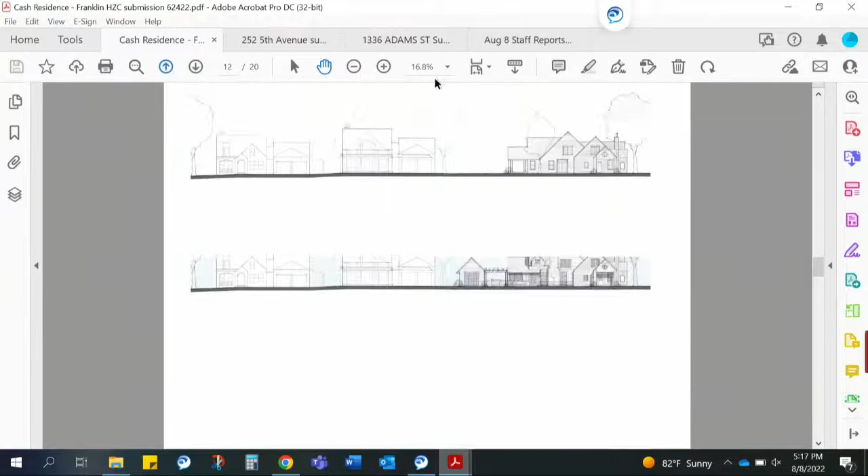I'm going to start with the principal building. We'll figure out the best location to start that. Okay, on the top of the screen is the existing elevation. This is the left side of the property facing Mayberry Road or Mayberry Court. This is the proposed, below it.

In general, the guidelines recommend that any alteration to a non-historic building serve as an opportunity to improve the overall structure's compatibility within a historic district, and that details and ornamentation should present minimal impacts to the historic district. The subject property consists of a historic residence with a substantial non-historic addition. The proposal seeks to address only the non-historic portions of the building, as well as construction of some accessory uses on the property. Therefore, the guidelines specific to the alterations are for alterations to non-historic structures.

So you can see on the screen, this is the existing elevation. The large portion here underneath this large gable, moving to the left, is all non-historic. The smaller gables here are the historic portion. There are no changes proposed to the historic portion at all.

The porch proposed to be enclosed is located at the rear of the property. The proposed enclosure is not highly visible from the street, and the materials proposed are generally in keeping with those on the newer and historic portions of the building. However, the implementation of a higher foundation line is not in keeping with the historic portions of the building and with the guidelines, which recommend designing such elements similar to those on the original building.

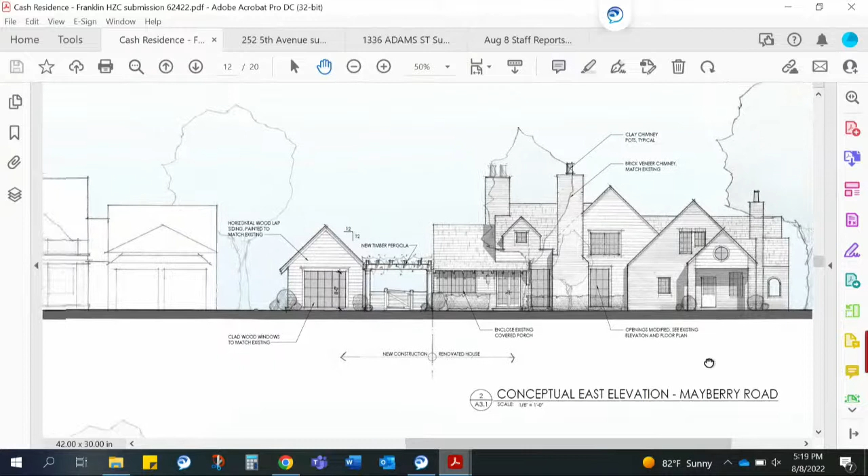For roofline alterations and dormer construction, the proposal includes the alteration of this rear roofline primarily through the construction of 2 wall dormers at the left and right elevations. Here's the one you can see on the left elevation. The one on the right matches.

And the alteration of the rear roofline, let me try to get that for you. Here, which is currently a different configuration, they want to change it into 2 gables that are bridged together. Right now, it's a single cross-gabled element across the porch there. The roofline is in keeping with the scale of this building and surrounding buildings.

The dormers are not entirely consistent with the guidelines, as the dormers are recommended to be recessed at least a foot off the exterior building wall. However, the proposed dormers are designed to match the architectural style of the building, which is Tudor Revival, and they're appropriately sized and located to fit for that style, and are therefore typical and appropriate.

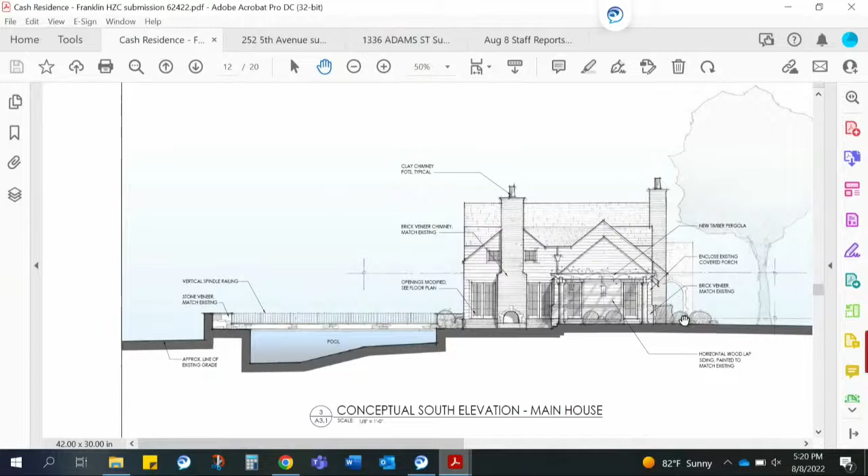There are some modifications proposed to various windows and doors, and I'm happy to speak to each of those individually if requested.

Essentially, it's kind of hard to show on the screen here. The guidelines recommend that new windows and their openings be designed to be compatible with the surrounding historic buildings with traditional solid to void ratios.

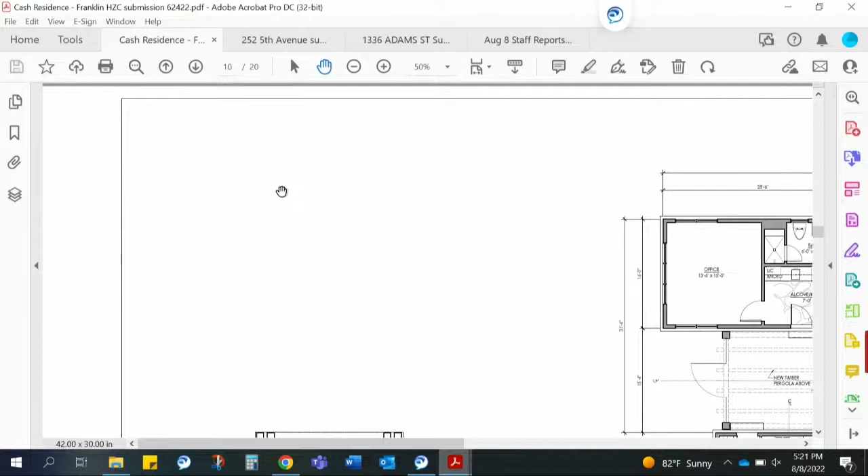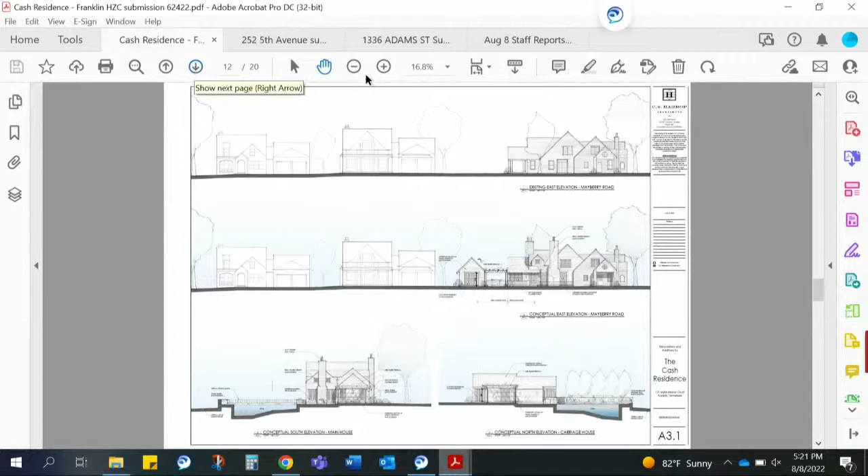The fenestration pattern on the non-historic addition, which would be the left elevation, the right elevation, and the rear elevation of the building, is proposed to change to relocate some doors, add some new windows, and to replace windows with larger windows to allow for more

light. So here on the east elevation, you can see the current configuration. There are 2 smaller windows, a set of double doors, and 2 windows above. The alteration, you can see, modifies existing openings and adds them to create more glazing on the rear of the building.

The windows and doors are all located on that non-historic addition, so the replacement themselves is appropriate and follows with the recommendations of our design review committee. The alterations are typical of the architectural style of the building and within the overall neighborhood.

Exact window and door specifications have yet to be provided. If approved, those would need to be provided to staff prior to building permitting approval.

Chimney construction. There is a proposal to construct 2 chimneys, one at the left elevation, which you see here, and one at the right, which you can see in the background. They are appropriate as they are typical to the building's architectural style and compatible in size, height, and massing to the existing buildings or the existing chimneys on neighboring buildings.

Clay chimney pots are appropriate. The guidelines recommend that they do not overhang the rim of the chimneys.

And moving on to the accessory structure, this is a proposed new build. There's nothing back there currently. The application includes the accessory structure.

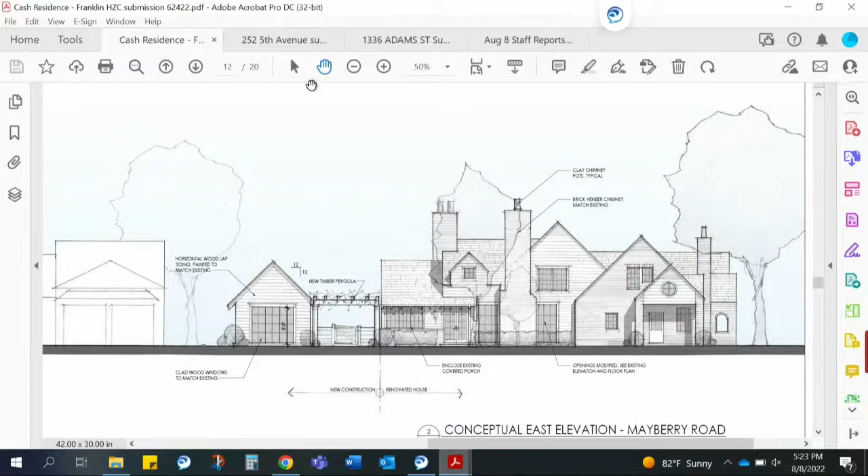As I mentioned on the principal building, the foundation height on portions of this accessory structure is higher than recommended by the guidelines. I'm going to shift up here.

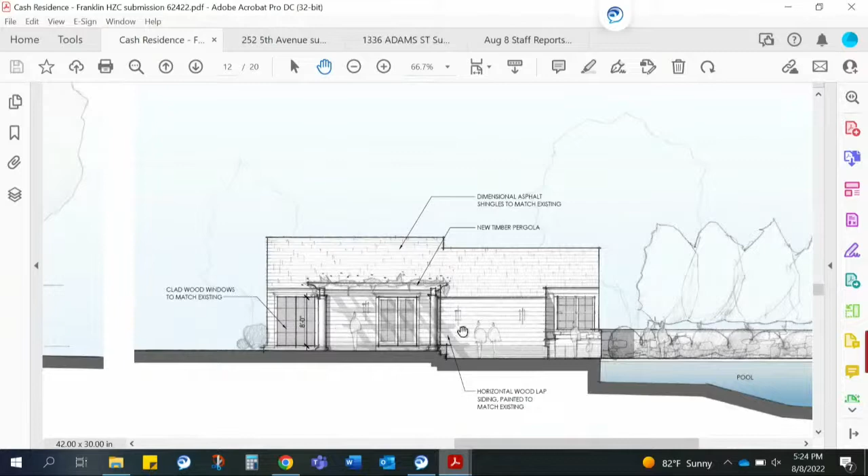You can see this is the rear elevation of the building, the main building. Here is the rear elevation of the proposed carriage house. You can see the foundation height comes up higher. This is the front elevation, excuse me, of the carriage house. This is the elevation that would face the back of the house.

And then there is an elevation here. This is the rear, where you can see that foundation height comes up to the bottom of the window sill. I suspect that's designed that way because this is the place where the pool deck is proposed to come from. It just transitions to the pool deck from here.

But in theory, the design guidelines would recommend that foundation heights or water tables match those on the historic building and be typical to what you see in the neighborhood, which this is not.

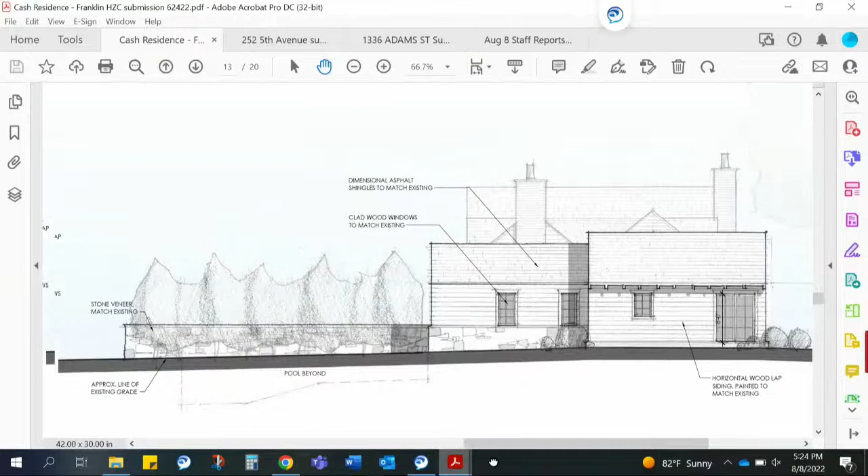The proposal also includes a pergola that's proposed to be constructed between the enclosed rear porch, you see the pergola here, and the accessory structure that you see here.

The guidelines do not specifically comment on pergolas, but they do note that site and setting alterations should be considered appropriate when they are undertaken in locations that are not visible from public view, do not involve the removal of historic features, and do not detract from or overwhelm the context of the historic district.

In this case, there is limited visibility of the pergola at its proposed location, but it complements and does not overwhelm the building or the district.

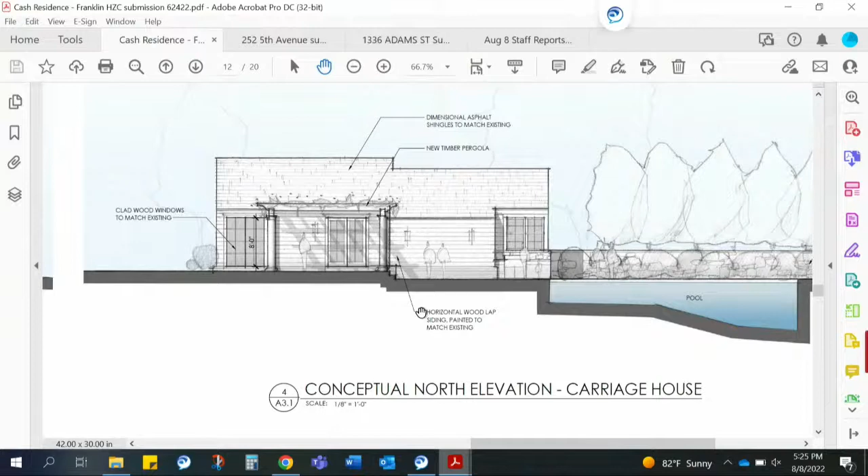Now there is a raised pool deck you can see on the screen here. There's also some renderings in the materials provided to you that show it from different vantage points. The proposed pool deck is to the right of the principal building, and also to the right of the carriage house.

The grade level of the deck is proposed in order to connect it to the principal and accessory structures. It's proposed to consist of a stone veneer comparable to that used elsewhere at the building, and I believe the applicant has brought some today to show you. It is also proposed to utilize a metal fence with vertical spindles as the railing on top, which is required for barrier specifications for codes.

The guidelines do recommend that decks be placed on rear or side facades with minimal visibility and use designs, materials, and scale in keeping with building character. This deck may be visible from certain vantage points in front of the building, but it is generally subdued due to the roadway sightlines, and it is located at the end of the street's block face. This is at the very back of the subdivision in which it's located.

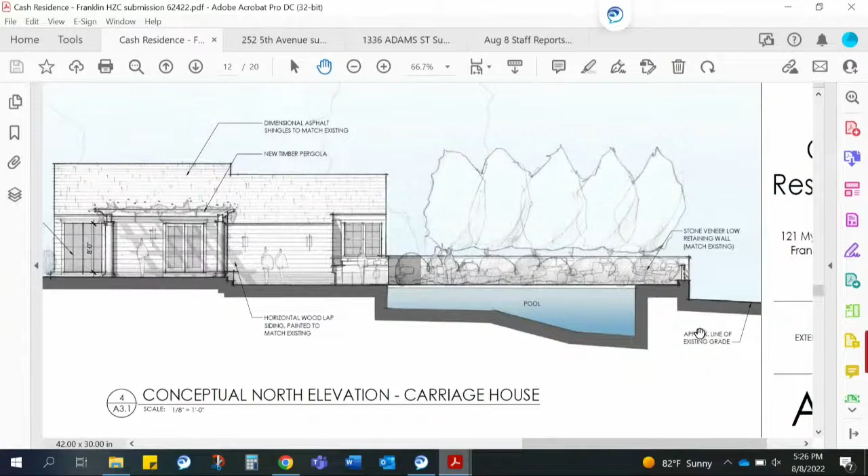Further, its construction does not involve the removal of historic features. It does not detract from or overwhelm the context of the historic district. So with that, it is recommended the commission approve the application with the following conditions. I will share those conditions on the screen.

The condition is that the applicant lower the foundation heights at the porch enclosure and the rear carriage house facade for adherence with the guidelines, that the alteration be submitted to staff or the commission for review and approval prior to issuance of a building permit, that the chimney caps be designed to meet all the guidelines, that new windows must be wood and match historic windows, and those specifications must be submitted to myself or the commission for review and approval prior to work commencing.

Otherwise, the proposal must meet all the other requirements of the Building and Neighborhood Services Department, including the consolidation of the affected lots. There are 2 lots shown here. They are not consolidated. That must take place before the work commences because the work spans from one lot to another. Thank you.

Is this the one, Ms. Pierce? It's trying to load. Okay, that one, yes. My eye just goes there, and usually in a picture, when your eye goes there, in reality it goes there too. So I don't think that close to windows is typical of what you see, and I'd love to see that be modified somewhat if that's possible.

And then my other comment would be about the fencing, have you seen a style of it, Amanda? Are you talking about fencing for the pool? Mm-hmm. They provided several photographs that show the inspiration for that. I just wanted to make sure. Yes, okay, so that's my comment.

Okay, do you want to make an amendment on the chimney? Well, Mr. Chair, before we do that, may I ask for clarification from staff? On condition number 3, where it says that new windows must be wood and match the historic windows, were you actually suggesting that they make those windows smaller on each side of the chimney? No, I apologize for the confusion.

That was meant to be that the windows be wood and match the historic windows in profile. Okay, right, I'll be more clear next time. These are actually new design guidelines.

Actually, if I can ask a question about that particular point, does the exterior need to be wood, or is it just the profile, muntin pattern? Is it about the operation, muntin patterns, pane light size? Is it about that, or is it about the material?

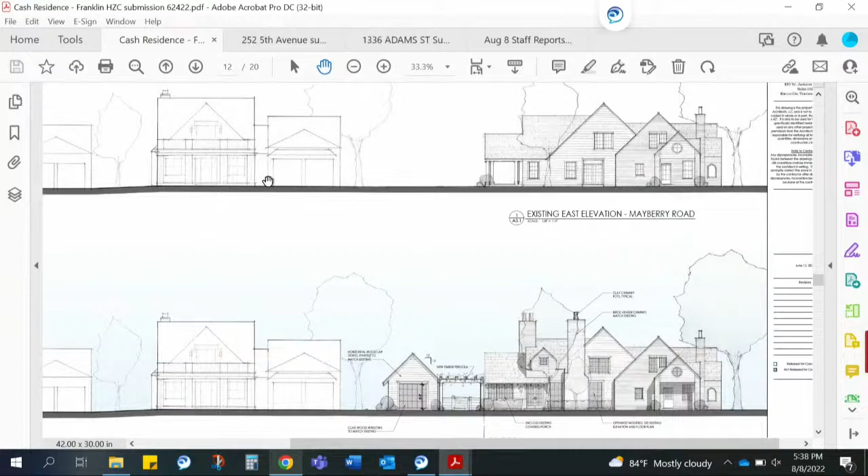Even though it's taller, it doesn't feel that way in the drawing anymore. And the chimney, I think he's right, the width can't be changed, nothing can be done. If he pushes it inboard and it just expresses itself a little bit, the drawing's going to look exactly like it looks today. But if we pull the windows apart, or if they can be pulled away from the chimney a little as a detail thing, or if the windows need to get a little narrower to accommodate that, then I think that's a good way to give us a little space and take a little bit of the dominance from that central section and distribute the weight more.

Where I'm coming from is I've just seen several projects we approved where I thought the chimneys were too large, and when they got built, they were. So that is my only concern, and if no one else agrees with that, I'm totally comfortable with that.

I think the thing about chimneys is we have to remember that 100 years ago, chimneys didn't have as many rules about how tall they have to be. So now we have to be 2 feet above a ridge line within 10 feet, and we get chimneys that are extraordinarily tall, and that's just a result of code too. So I get both arguments, but we have to meet code, and I don't want to tell folks they can't have chimneys, but they are a certain size. I think what you've done helps the elevation and the scale of what was not a bad addition, but had some scale issues certainly. We can all agree on that.

So, Mr. Chair, what I would affirm to Ms. Pierce's point is that when you look at the drawing of the proposed addition, to the far right where you see the original window, and then you come to the left and see the two large windows, they are kind of out of scale in proportion to each other. To some of the points made here, if those windows were scaled down a little bit, it might relieve the discrepancy between the historic and the modern and the mass of that chimney.

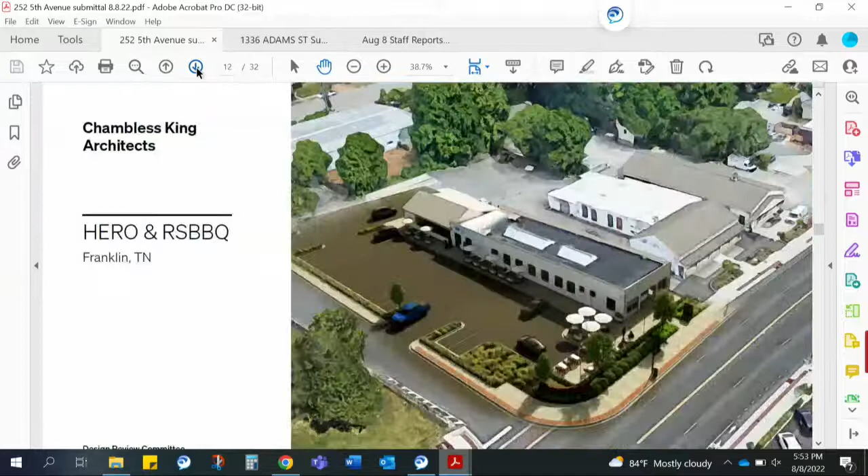I'm going to skip ahead to the various options. Oh, here's the historic photograph. For those who weren't at DRC last month, you can see there's a significant window size here, a centered entrance, and bulkheads with windows on either side. This was a centered entrance on the building.

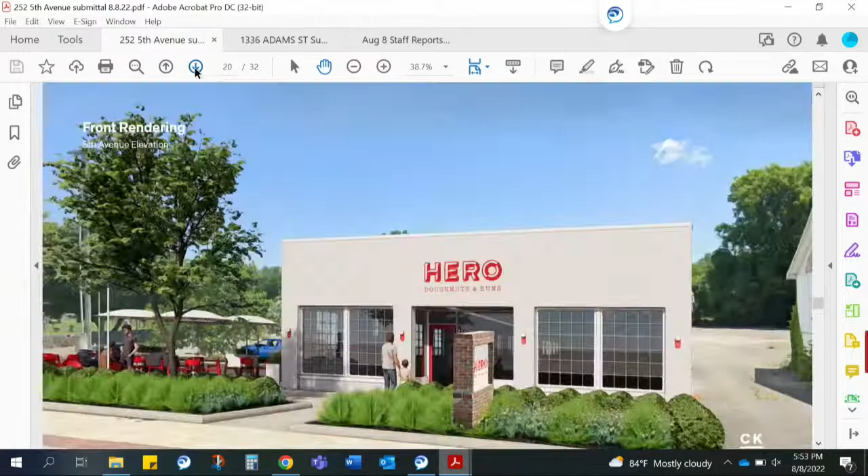So the applicant has provided various options with the door centered on a bulkhead or with no bulkhead, door aligned on the sidewalk with or without bulkhead, and vestibule bump outs. I'm happy to go through all of those if requested, but staff is reviewing this in light of the guideline recommendations. While it's difficult to tell what the original bulkhead material on the storefront was from the historic photograph, it appears that it may have been wood or tile, not masonry.

So option B here on the screen, with the centered door and the fiber cement paneled bulkheads underneath the windows, to me is most closely matching the historic appearance of that facade. In accordance with the guidelines, option B would be most appropriate because of that.

The original windows appear to have been a glass block material, and the DRC supported the use of more typical storefront glass, though with grids, to pay homage to the original and current appearance. Information has not yet been provided to specify how the storefront windows are proposed to be gridded, but either reuse of the existing windows, or replacement with a truer simulated divided light with a wood or metal muntin and mullion pattern, would be most appropriate based on the age and architectural style of the building.

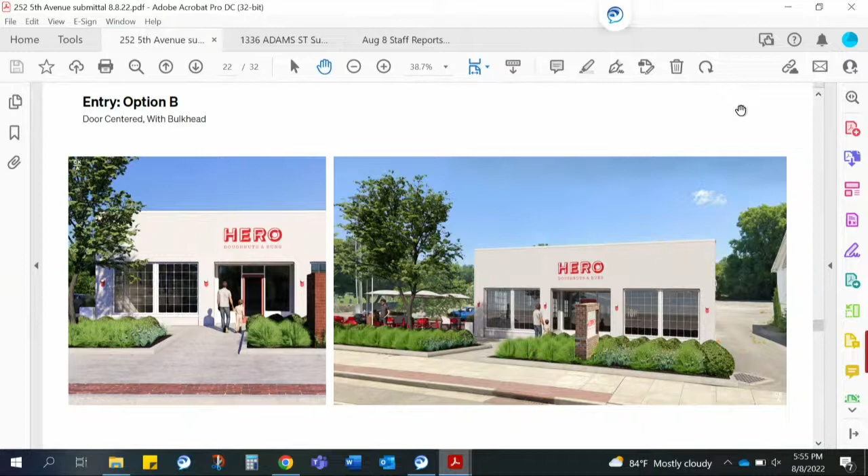Now with the left facade, you can see here on the screen, like I said, it has an addition at the back. The new entrance is proposed here with some windows added on the addition.

And here's a rendering to show that. The guidelines recommend against the placement of new entrances on storefronts, and note that if an additional door opening is required, it should be added to the rear facade, with simple detailing that complements the historic entrance. While this is not located on a rear facade, the proposed door opening is located at the rearmost location of the left facade of the historic portion of the building, and the new entrance is designed to read as secondary in size and detailing from the front entrance.

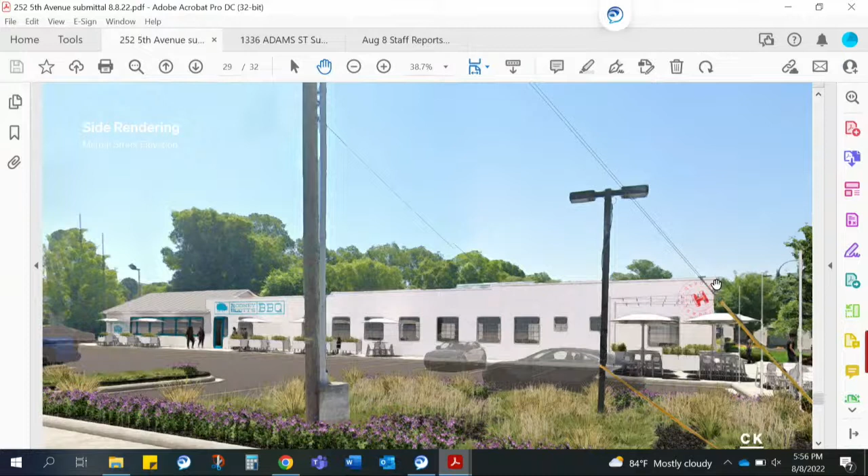Windows are proposed to be on the addition. The guidelines recommend that any proposed windows be placed on non-visible facades. While the date of construction of this addition is unknown, outward-facing facades without fenestration, like what you see currently, are not typical. So the guidelines would recommend that if windows are approved, new windows should be designed with historic profiles and dimensions compatible with the historic building. Wood or metal storefront windows with clear glass would be most appropriate here based on the age and architectural style of the building.

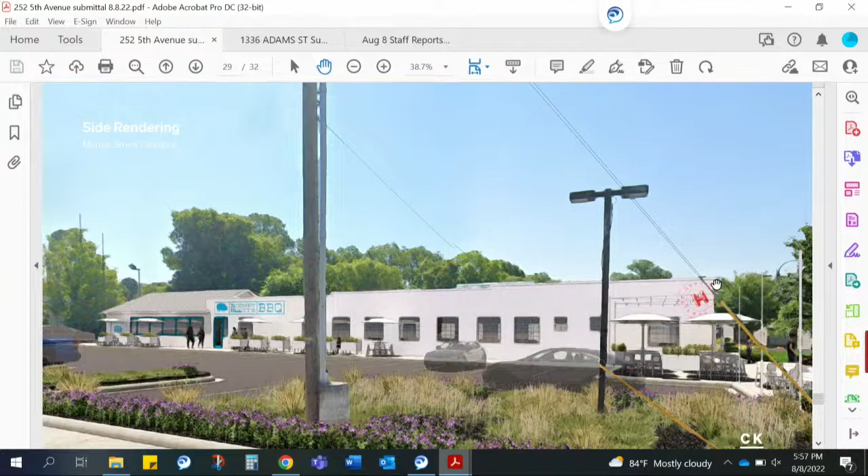It is recommended the commission approve the application with the condition that the applicant utilize option B for the storefront, what you see on the screen. Based on the analysis, on the front facade, the applicant must either reuse the existing windows or replace them with a true simulated divided light with a wood or metal muntin and mullion, the vertical and horizontal bars. On the left facade, the applicant must utilize either a wood or metal storefront window. All new glass must be clear. The historic windows on the original building's left and right facades must be preserved and maintained, as those are very much character-defining windows.

The signage is not approved as part of this plan. Signage would need to include additional information and would be reviewed separately for issuance of COAs, potentially eligible for administrative approval. The application must meet all other requirements of the Building and Neighborhood Services Department prior to issuance of a permit. Thank you.

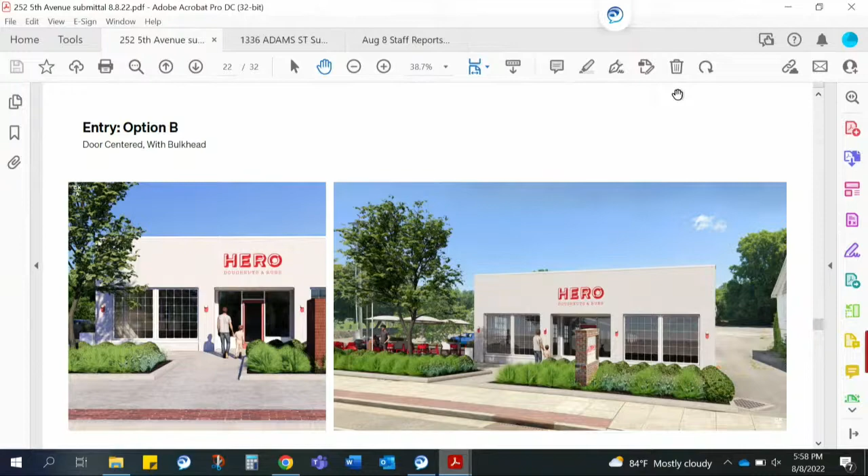I'd like to add one more thing. There are some project considerations I provided for the applicant. I won't read through all of those, but I'd like the applicant to be aware of them before they apply for permitting. Thank you.

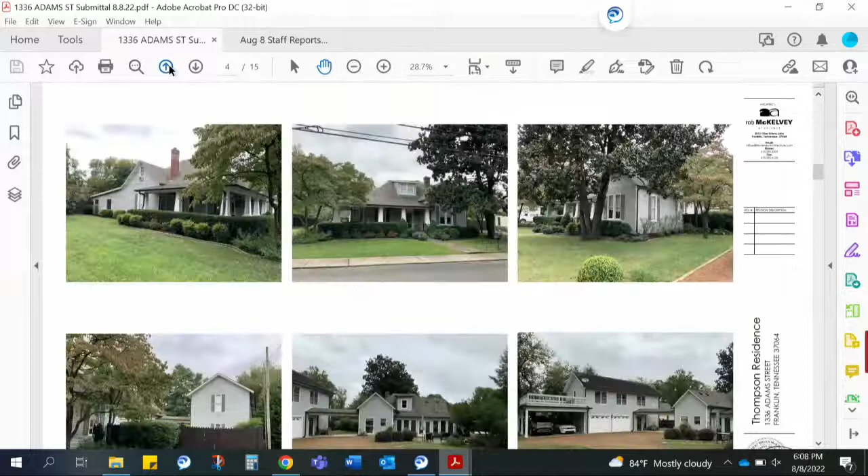Here's the rear addition, if that helps, so you can see it. So there is an addition, a dormer here. They'd like to remove that and then add another gable form for the new addition, and then hip them together at the rear, which would allow for some ceiling height.

Due to the location, the area would not be highly visible from the intersecting street, Gist Street, or from Adams Street. The addition is proposed to be inset from the existing left facade wall, and because of this, this addition would be clearly identifiable from the original form.

The remaining lower level additions at the back of this gable. It is proposed to be recessed underneath the gable eaves here, so that it's going to be apparent through that roof break that is a new addition, as differentiated from the original.

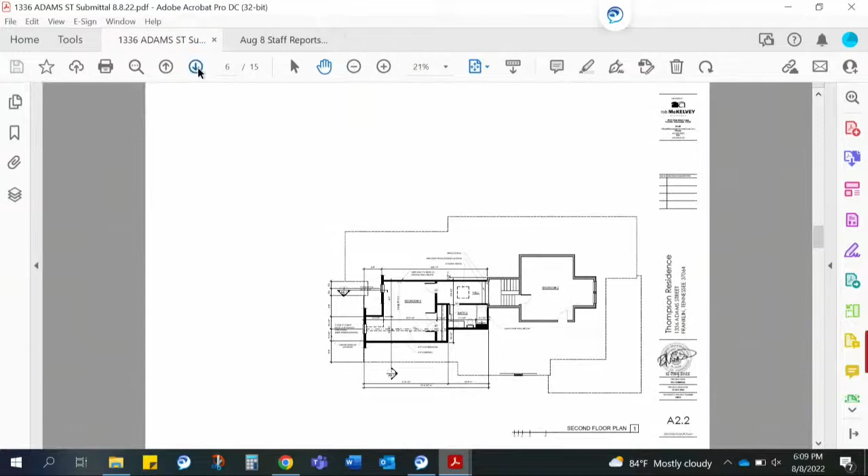So I will go back so you can see the elevation. It's very tucked underneath there. There was a different proposal before, and I worked with the architect on that, but this is just tucked slightly underneath the existing gable. If you were to look at it from the right side elevation, you can see how that's tucked in, and you can see the break there. Nice.

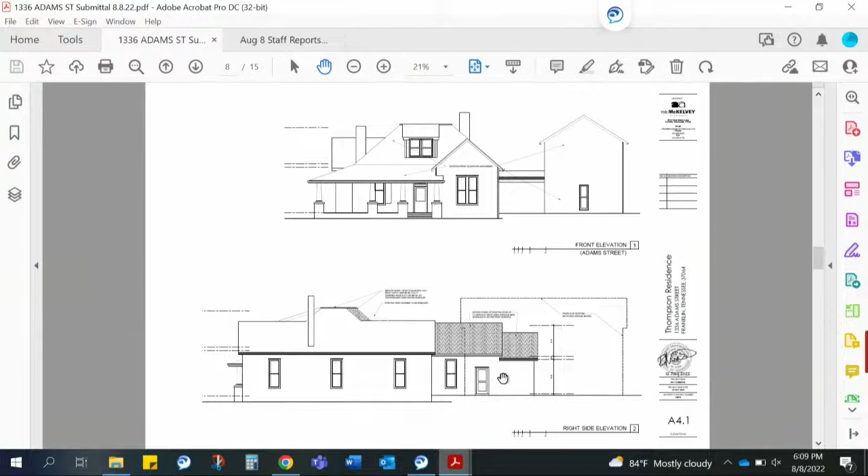The materials of the addition are fiber cement siding to match the existing, asphalt shingle roofing, and window and door specifications haven't been provided, nor has the foundation cladding. The size of the proposed addition is approximately 23% of the historic structure, which is consistent with the guidelines.

It is recommended that the commission approve the application with the conditions that the windows have historic profile and dimension, consist of either wood or a composite material with the appearance of wood, and that the window specifications be submitted to staff for review and approval. That the foundation material match that of the existing house, and that it meet all the requirements of the Building and Neighborhood Services Department prior to issuance of permitting, with any additional changes proposed coming back to staff for review and approval. Thank you.

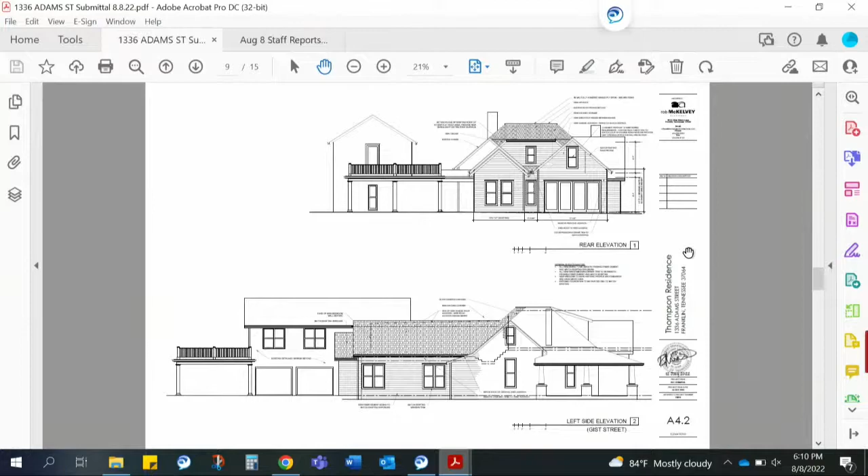Would the applicant please come forward? Hi, my name is Rob McKelvey. I'm the architect representing Wayland and Tina Thompson. Any other comments other than what Amanda said? Nope, not at this time.

Okay, any citizens? May I, homeowner, I think he would be in favor of it, I'd be my guess. I did fail to mention one thing that was brought to my attention.

There is a note on the plan, on the site plan, that shows a fence being proposed around the front perimeter. I did not notice that during the review. I would not have had enough information to substantiate a full review on that anyway. Front yard fences do not qualify for administrative approval, so if the applicant wanted to proceed with that, it would be recommended that that portion not be approved and come back later with additional information, including not just the perimeter as shown here, but a spec that shows the design, the materials, the profile, and the height.

Was the intent for that to be included, that small front decorative fence? Yes, but I don't believe that's a deal breaker on this. No, okay, not at this stage. We're willing to approve the addition. We won't even deal with that at this juncture, okay. It's a lot of fence. Well, there's a picture on the site plan of the design, its intent.

Is it new, or are you just repairing it? It's modified. I see the existing wood privacy fence to remain, with some repair and patching proposed. And then if you go to the driveway, is it here? Just a little further to the right, right there by the driveway, right where your cursor is. So basically you want to take the middle fence and pull it in to connect to the house? Correct.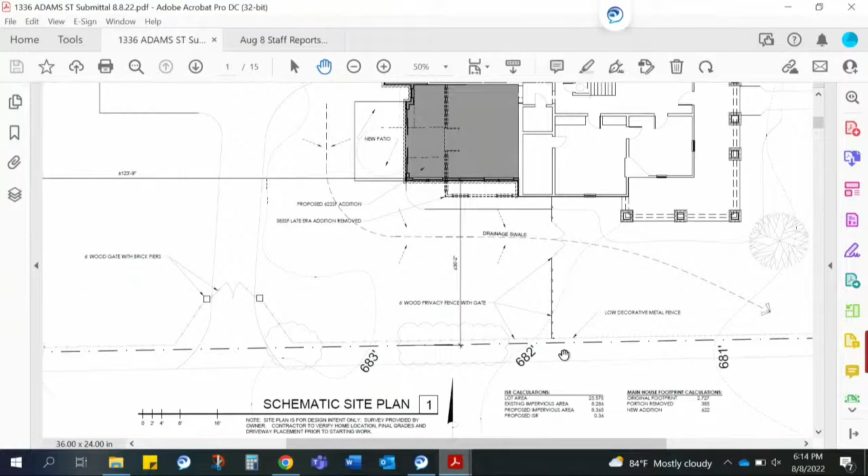Yeah, right, that segment right there. That's something that can be approved by staff through a brief administrative process. So it'll require you just filling out a 2-page application for me. But I can handle that because it appears to be a rear yard fence. Correct. All right, so the motion then is to approve with conditions except for the wrought iron fence, or the metal fence. Anything with respect to fencing was my motion.

Okay, all right, that way there's no confusion. Amanda has just said on the wooden piece that's already there, she can approve that piece. Right. I think what Mr. Denton meant is that he wants staff to review that portion as well, but it qualifies for staff review. Yeah, well, that's what you'd said originally, so that's okay, all right.

Any discussion then? Good with this. Ready to vote? I had to look at these drawings a few times. Oh, you hadn't been here for the previous? No. So this is...

I understand the guideline kind of necessity for that roof break on the new addition. Dropping down, it is still a little peculiar looking, but I guess if that's the rules, that's fine. I don't know if that's better or worse, just to let it come straight out instead of kind of this Frankenstein-looking thing. It took me a minute to figure out the roof.

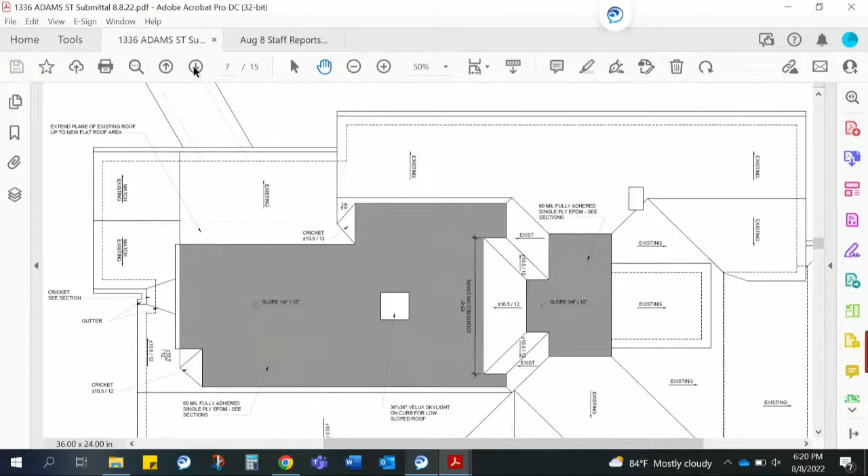It's gray, really light gray. Oh, I see what you're talking about - that's the new roof on top of the historic roof. Anyways, it's a very complicated roof. It is, and I'm trying to understand it. I don't have a problem with it, I'm just trying to make sure I understand what's going on and why it looks this way.

Okay, anything else? Everybody clear, ready to vote? All in favor of the motion to approve with the condition, except for the fencing, please say aye. Aye. Any opposed? We're done, thank you.

I do agree, it's time to go to dinner. That's funny. Anything else to come up for the good of the order? Move to adjourn - it doesn't need a second. Move to adjourn. Second.

Mr. Chair, can I say one thing? I have been looking at projects we've approved. There is more to windows being appropriate than them being wood. We were offered by the gentleman who's the window expert in Nashville that he would do a workshop for us, and I would really like for that to happen - that's my request. I am looking to schedule a workshop, a training session for the commission. It's been difficult with a lot going on, being short-staffed, but we try to do that around October.